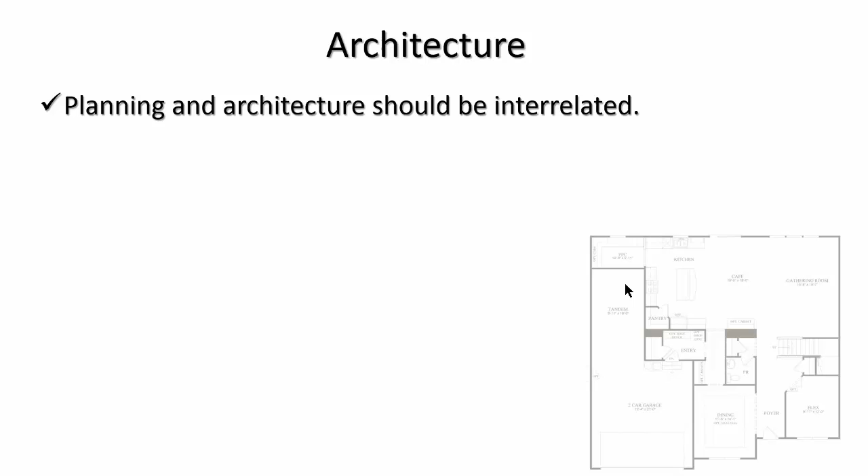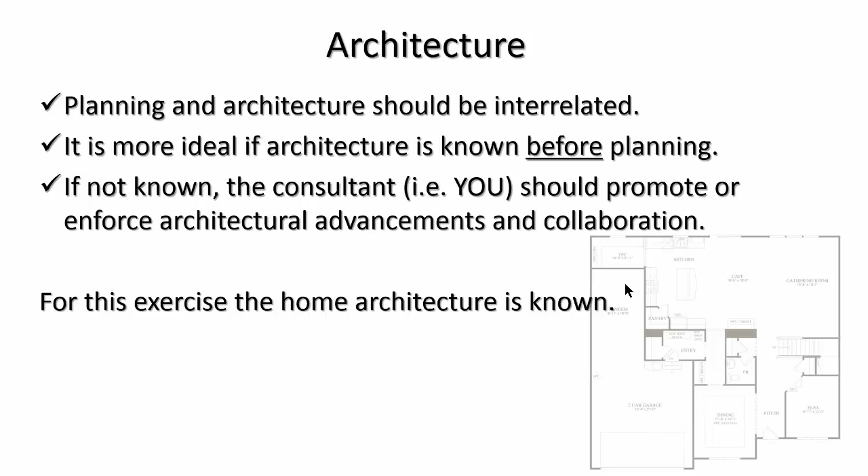Planning and architecture should be merged. They should be interrelated. If not known at the front—for example, what architecture—the consultant, you're hired to consult, you should be promoting or enforcing advancements and collaboration. It's more ideal if the architecture is known before planning, but it's not always known. For this exercise, we know the architecture; we've already consulted with the client.

A lot of people are afraid to bring up a recommendation. From a very young age, we're always conditioned: no, don't do this, don't do that. It's ingrained in us, and after a while we just stop asking. And the problem with that is it stagnates progress.

If you never bring up an idea, the answer can only be no. So your job as a consultant is to consult, to push the industry forward. There's no problem with a client telling you no, I don't want to use it. But what if they say yes? Then you are at the forefront of a leading movement to better development.

And that is a consistent theme within the LandMentor training.

The building blocks of CAD are much different than the building blocks of LandMentor. CAD actually uses the term blocks, but it's simply a line work of data. We don't have blocks; we have what's called groups. And in this lesson, you're going to learn the difference between a block and a group.

Any LandMentor file is essentially a group. We have no different file format—it's just one file. So I want you to start out by reading in your directory that's supplied. There's a Houses for Class directory. I want you to open that file, and you're going to see a list of houses.

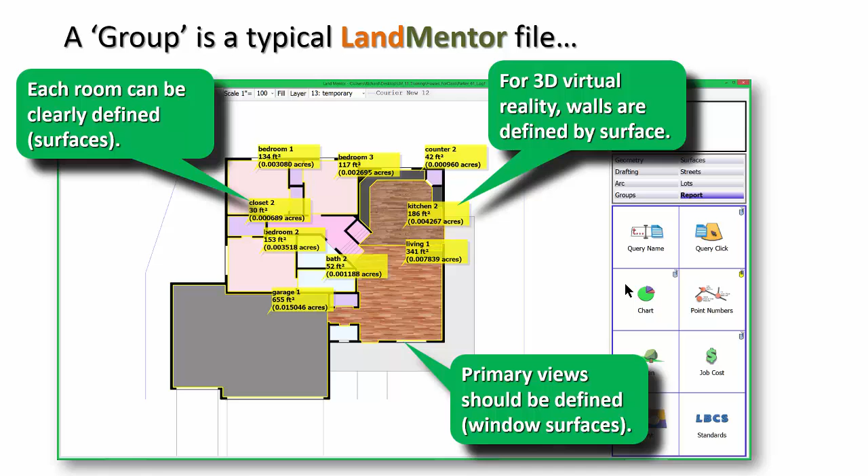Now on a very large development, this would create an enormous amount of data, but if the development is say less than 400 or 500 units, there's no problem with having this level of detail. But sometimes we reduce the level of detail when it's a big plan.

So that same group, when looked at in a 3D setting, the walls have been defined with a 9-foot height, the cabinets almost a 3-foot height, the porch a slight height so it pops out, and the windows are defined with a 3-foot height. So you could see the rooms, the window locations and things like that when you look at this in a 3D setting.

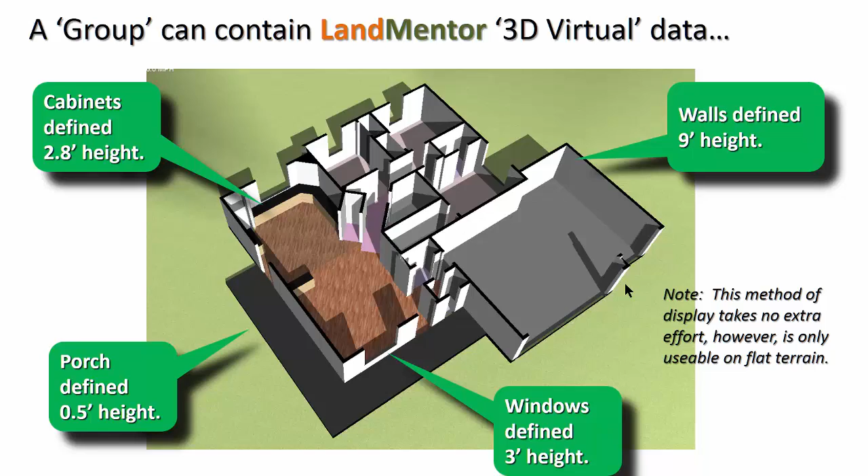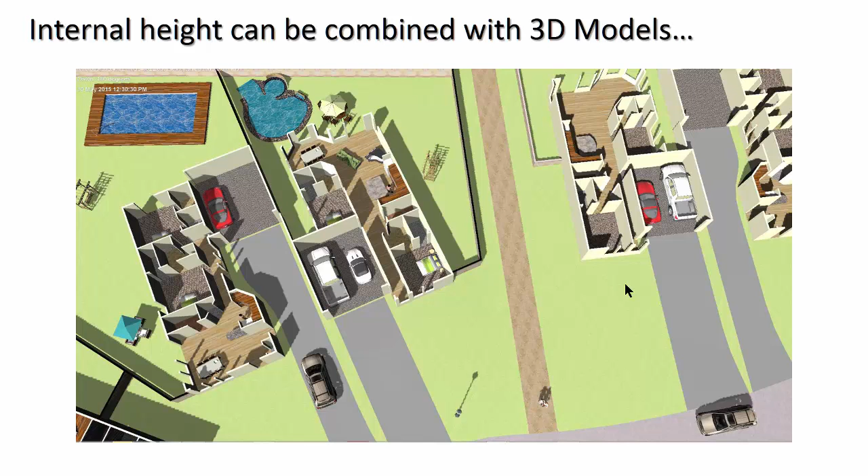And then you could take and use that exact same data to make out points. For example, I just dropped SketchUp models in a massing. A massing is taking a flat surface with height of surfaces—for example, walls and windows and fences—and then looking at it in 3D, so you can see the infrastructure or the function of how the floor plan relates to the site plan. Then by placing people and cars and furniture and stuff like that which came with your system, it's easy to make points and visualize.

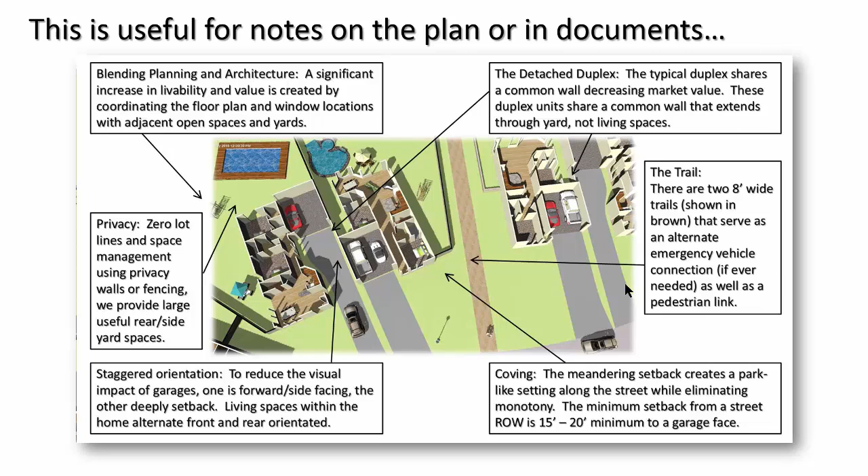And then what you would do with that drawing is put it in the PowerPoint and add your notes, and then you could save that away and put it on your drawing or a report.

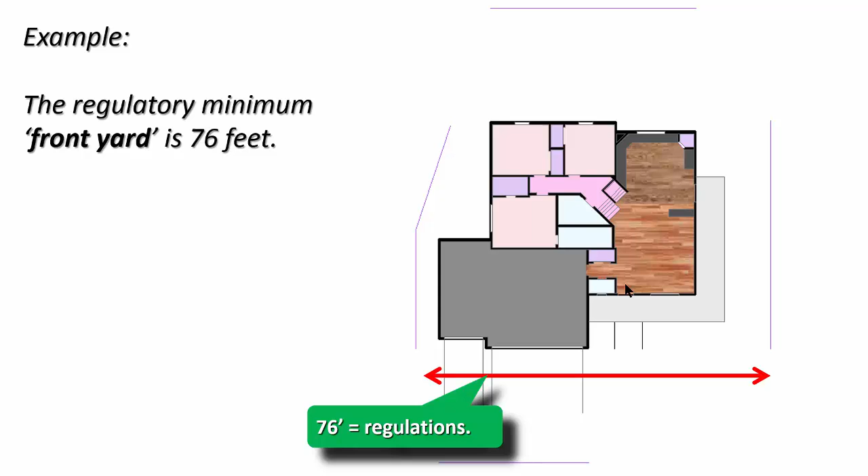We're going to teach you legal methods to use architectural to your advantage. For example, the regulatory minimum front yard is 76 feet. And when you look at regulations, they almost always mention only front yard—the width at the front yard setback. It is incredibly rare for them to ever think of the backyard.

So the backyard—if the home is not as wide in the back as in the front—the rear can be less than the minimum. And so what we've done is put a kink in the side reference line. It's not a lot line; it's a line that represents the minimum that a lot line would pass through, to be used as a guide.

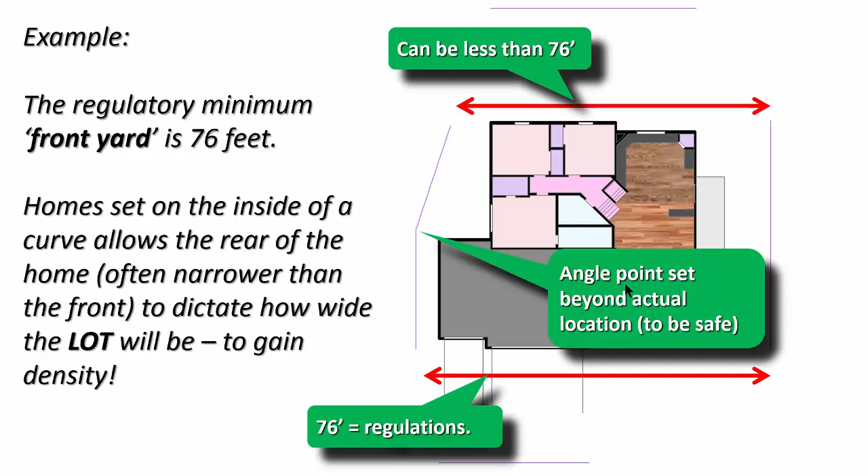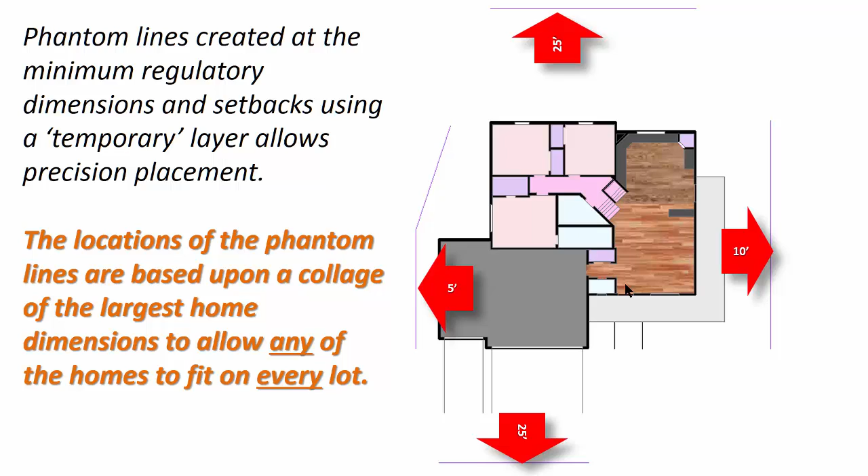Phantom lines created at the regulatory minimums create the basis for placing your units, whether it's multifamily or single family. These phantom lines were placed at the regulatory minimums, and as long as you don't cross those points or those lines, every lot should be legal.

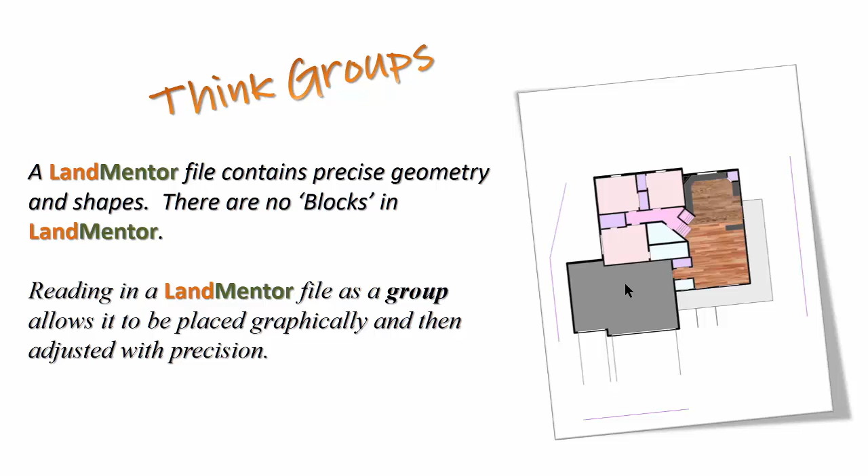A group is nothing but the file that you're looking at. It's saved in the exact same way as any other LandMentor file. It can then be called in and merged with the geometry. So how does a group file differ from a typical plan file? It doesn't. Let's now load the next exercise.

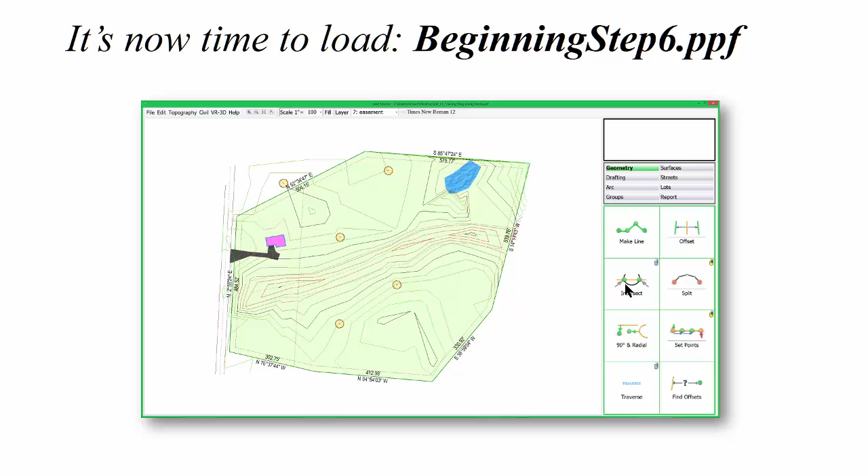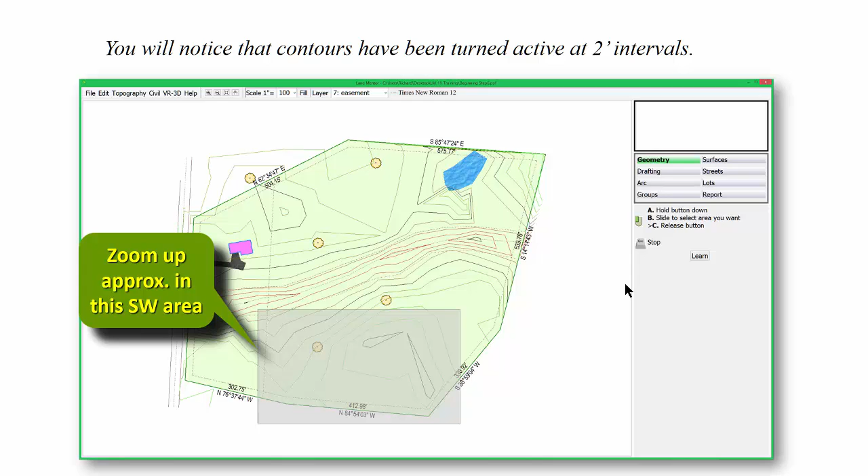Load beginning step 6. And again, like always, if it asks you if you want to override the file that's in memory, answer no. You'll see this come up on the screen. I want you to zoom up approximately in this area of the site, as close as you can to match this image. You should see something like this.

You'll press the groups function, and then you'll add a group. In this case, Parker 61 left, and then open. A pop-up will come up after you have a group. If you're using groups for geometry, you'll select fixed. If they're graphic only, like trees or something you don't want to use for geometry, you'd hit graphic only. So for now, we'll just concentrate on fixed.

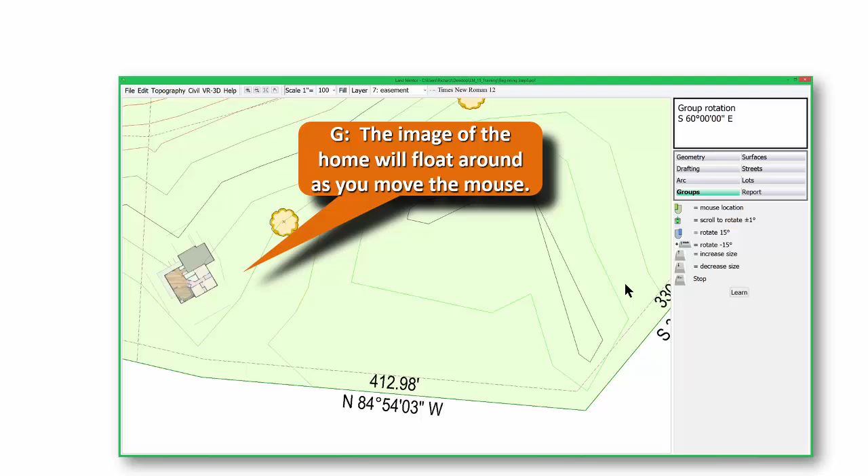An image of the home will float around as you move about with the mouse. It's going to be slightly transparent. Looking at the functions on the right menu, you'll be able to scroll at 1 degree increments with the middle button, 15 degrees with the right button, and shift plus right button will go counterclockwise 15 degrees. You'll set it with the mouse left button. Don't use increase or decrease size - that would be more for graphics.

Using the mouse buttons on the prompt, approximately move your home there, then press the left button to set it, and you'll see a new phantom home move about. Use the left button to set these and the middle button to rotate them slightly, 1 degree at a time, and set these 3 models with a gap.

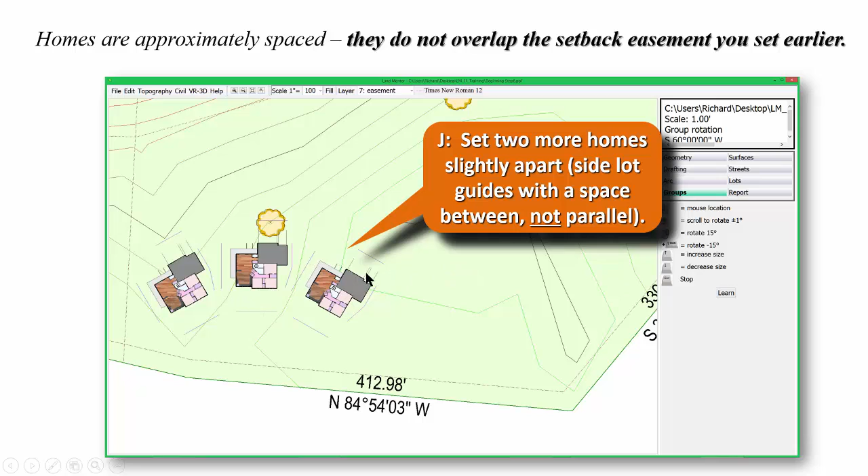It's very important to have a gap, like you see between those endpoints. The reason is that you're going to be snapping to these endpoints, and if they're too close, you won't be able to see them. So you intentionally make them slightly apart to ease your work. Notice they're not perfectly parallel. Then press escape to get out of it.

So why did we choose the garage on the left side instead of the right side? We chose the garage on the left because as you're entering the neighborhood, you don't want to see garage doors - you want to see those beautiful porches. Setting the garage on the far side of the entry softens the impact of the garage. You want to have them on the far side of the home.

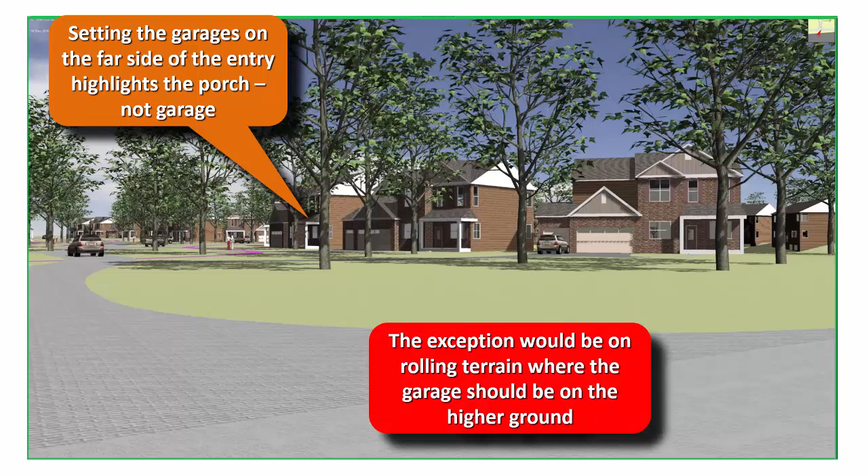The exception would be if there's a better view, or you're going uphill or downhill at the entrance - you'd want the garage on the high side. The garage should be on higher ground, so in an actual application you should have the contours on, like we do here, but this site is relatively flat and it's actually going uphill. So zoom up on the area.

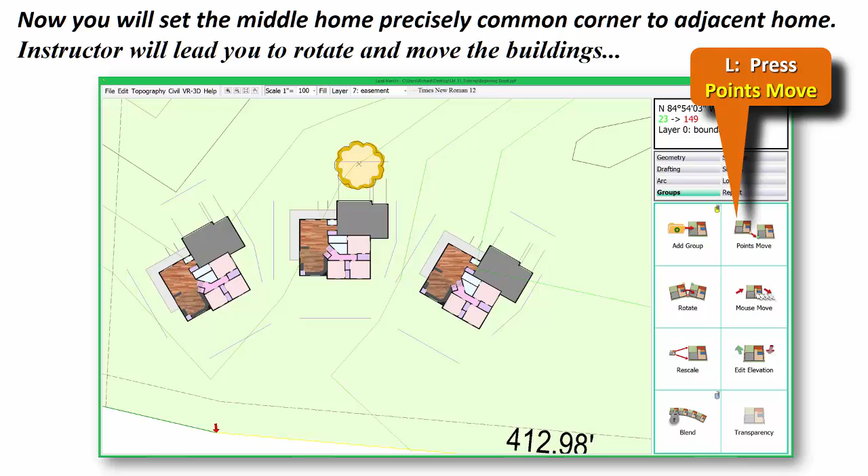We've got our models graphically set, and we're going to move them to exact locations. To do that, we're going to hit points move. You'll select points move, place your mouse inside the group, and press the left button to highlight it.

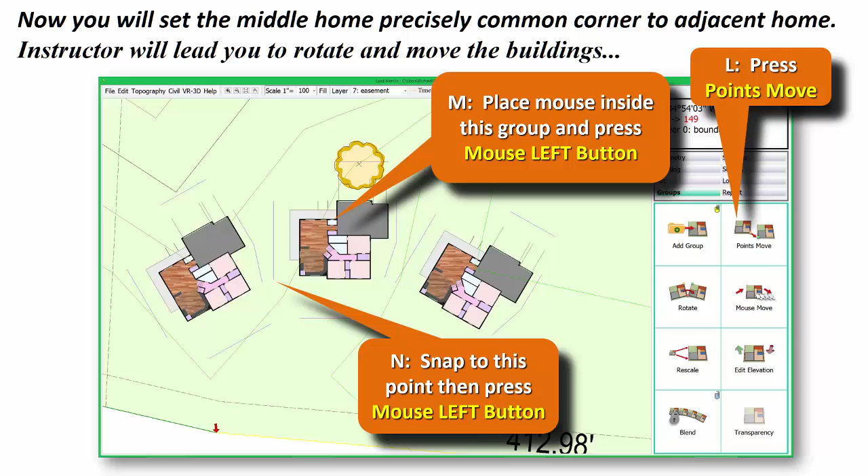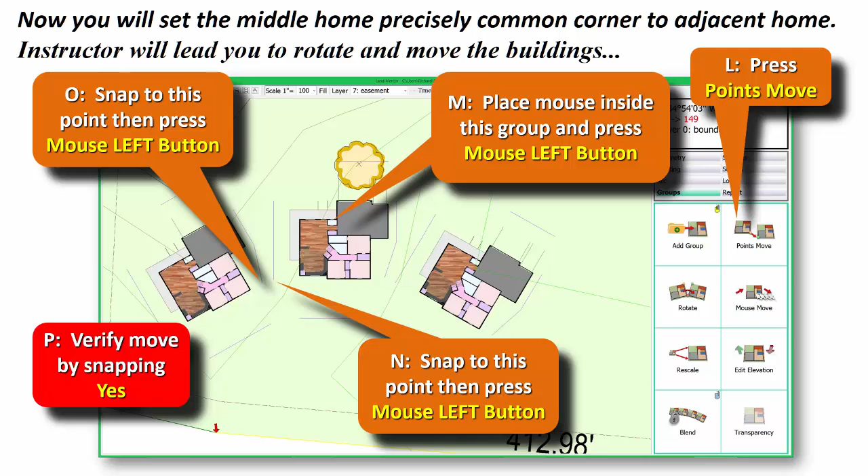You'll see it highlighted, then go to your reference point on the model with the left button, go to the next reference point and snap to it with the left button, and you'll see the model. Now the prompt will change and guide you through it, but this is essentially the steps. It'll say verify move by snapping - answer yes - and then you'll follow through to move and rotate. This will be the next step.

So you can see we've got those 3 models. I'm just going to repeat what we said, but it'll be live on the screen: points move, select the group, then point from, point to. It's pretty simple. But I want to rotate this group so it's exactly on this preset line here, and to do that, I'll hit rotate.

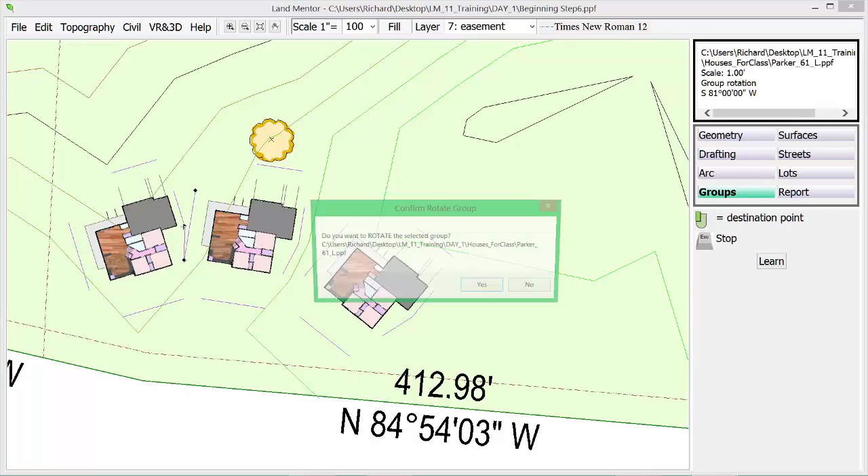The point, the group you want to rotate, the point you want to rotate about, the point from and the point to - and then I'll answer yes, so I don't have to keep track of degrees, minutes, seconds.

Now that these two are together, I'll do points move - select my model, from, to - and then rotate: select my model, rotate about, from, and to. And now what I've got is the home set at the absolute minimums.

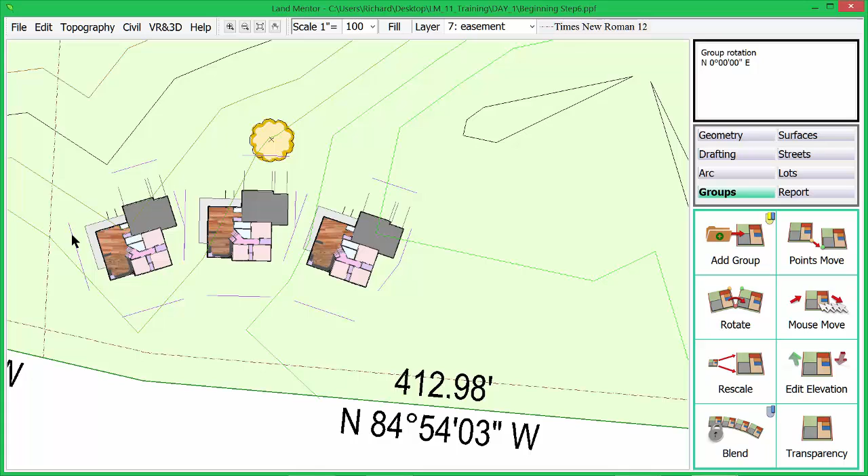So when I pass lot lines through these lines, I know it'll meet the minimum, and I've created this by looking at the homes first and the lots second. That way you can concentrate on what you're viewing, where your living areas are, what the garages are, where they're positioned - things you would absolutely miss if you did the lots first and the homes became an afterthought.